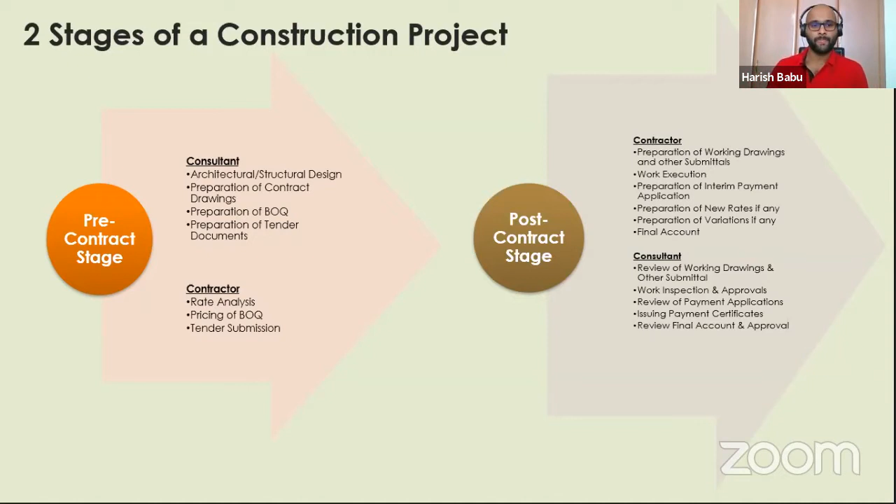So these QS responsibilities, I will go into detail now. First is preparation of BOQ. What is a BOQ? BOQ is nothing but bill of quantities. As I told you, this preparation of BOQ is the responsibility of a consultant QS in the pre-contract stage.

So how will he prepare the BOQ? He is already having the contract drawing, which is prepared by the consultant. He will review the drawings, and accordingly take the quantities and prepare the BOQ. How will he prepare the BOQ?

While preparing the BOQ, there are a lot of criteria to be met. There are some points to be noted: first, unit of measurement should be as per standard method of measurement. Inclusions and exclusions should be as per standard method of measurement. All items should be separately mentioned as per standard method of measurement. So it's all about the standard method of measurement. What is that?

It is a standard. Everywhere there is a standard for method of measurement. In India, we use IS 1200, Indian Standard 1200, for referring the standard method of measurement. But in foreign countries, including the Middle East, here in Dubai also, we use CESMM3, which is Civil Engineers Standard Method of Measurement Edition 3. This is what we refer to here in the Middle East and most foreign countries, while in India we use IS 1200.

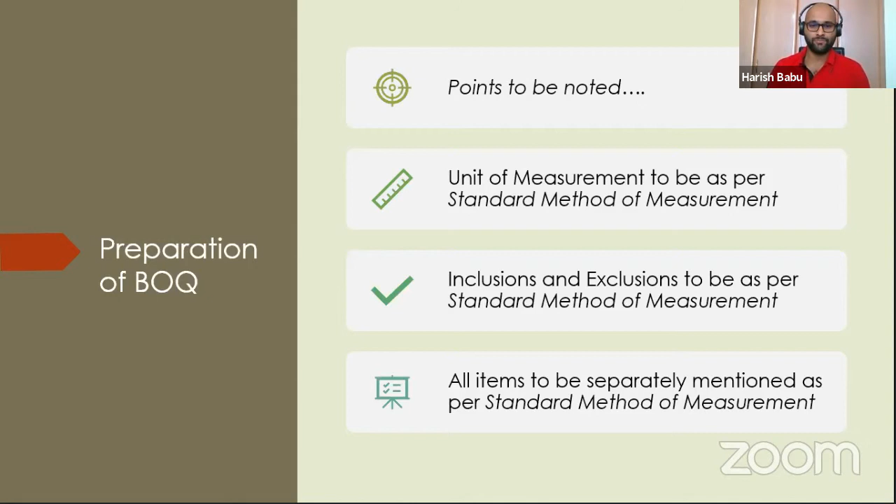This is the question: this is a plan of a concrete slab of 5 meter by 5 meter size, having a thickness of 100 mm. There is an opening of half meter by half meter at one corner. My question is, what is the BOQ quantity or payable quantity for the concrete as per IS 1200?

Basically it is a calculation question, very simple for everyone. If I ask you what is the volume or what is the area, then it is very simple. But I'm asking what is the BOQ quantity or payable quantity as per IS 1200. Here is the importance of a standard method of measurement. So before telling you the answer, I will just show you what it says in IS 1200.

This is a screenshot I have taken from IS 1200 part 2, which explains concrete works. Here you can see, first thing, unit of measurement: unless otherwise stated, all concrete work shall be measured in cubic meters. In this question, I have given the options in cubic meter and square meter. So the first doubt is clear now: it should be in cubic meter, not square meter.

Next, what it says - in this question, our doubt is whether to deduct this small hole or include it. We can refer to what it says in IS 1200. You can see here, no deduction shall be made for the following: opening up to 0.1 meter cube, or as specified.

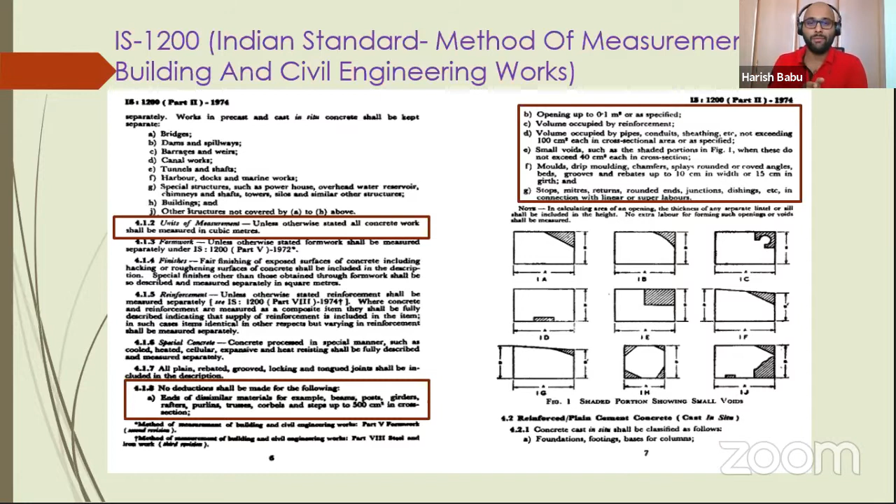Which means no deduction can be made for openings up to 0.1 meter cube. If the volume of the opening is less than or equal to 0.1 meter cube, no need to deduct that area. Coming back to our question, this opening is 0.5 by 0.5. If you calculate the volume of that opening, it will be 0.5 by 0.5 by 0.1 - thickness is 0.1, that means 100 mm. So the volume will be 0.025 cubic meter, which is less than 0.1. So no need to deduct the volume of that opening.

So now it's simple: 5 meter by 5 meter by 100 mm. It is very simple now, 2.5 meter cube - this is the answer. I think around 20% of people gave the correct answer, so it's basically a calculation.

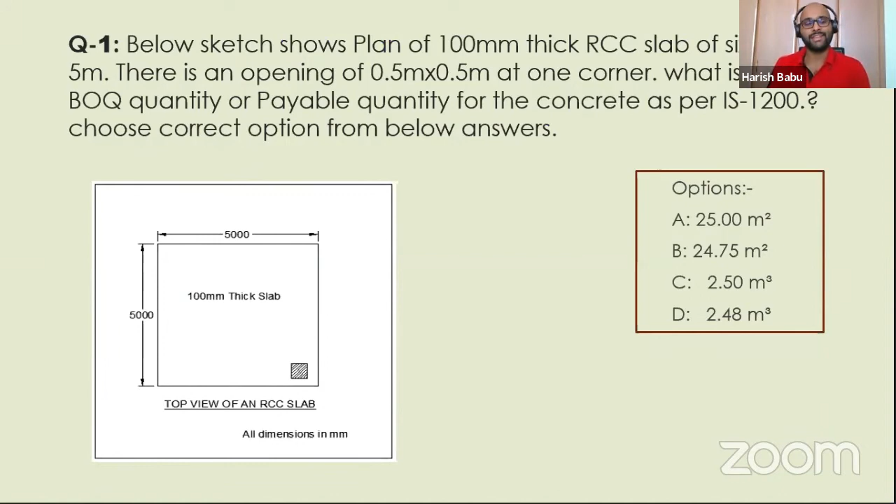But the thing is that we have to refer IS 1200 if you consider it is for a BOQ quantity. That's it, I just want to show you this as a simple example of how we will deal with these things when you are working as a QS. That's it. And the second question...

I will show you here, this is what we refer here, Civil Engineers Standard Method of Measurement, CESMM3. I just give you one screenshot of CESMM3, in which there also you can see...

It is mentioned here, cubic meter, and measurement rules are mentioned here. Pockets or holes which are defined as large or small voids in accordance with rule D3 of class F, and it mentions what is small and what is large. So this is how we are referring, the same way we referred in IS 1200, we are referring in CESMM3. I'm just comparing the difference in the standard methods of measurement.

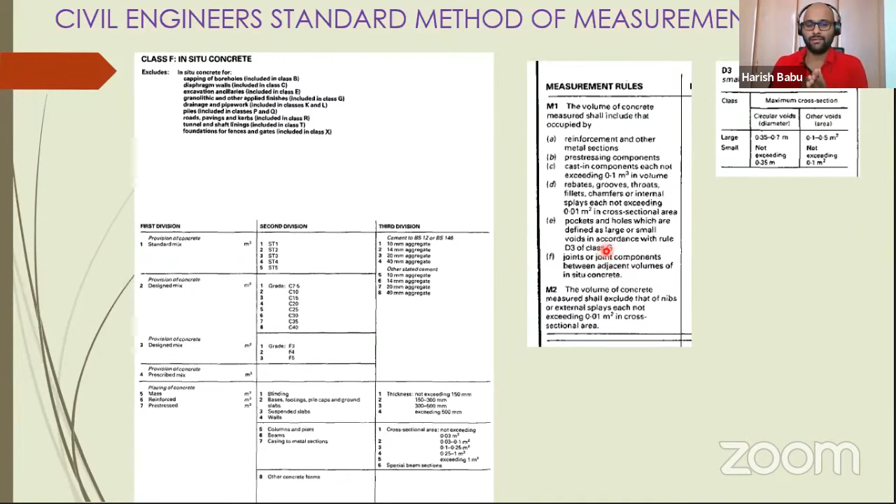That's it. Then we are going to the next, second question, what I asked you. Here we need to excavate a pit of size 6 meter by 5 meter by 5 meter. On the side, we need to excavate extra because if you are excavating in one stretch, the wall will collapse, so we need to give some extra step there. Now the question is, what is the BOQ quantity of excavation for this excavation?

My question is, what is the BOQ quantity as per IS 1200? Not what is the volume of excavation in this picture - that is very clear for you, you will take the step also on the side, add both, and you can get it very easily. It's a simple calculation.

But if you refer IS 1200, you have to know whether this additional step is to be included or not. That we need to check. So if you check in IS 1200 part 1, which is for earthwork, it says here, the following work shall not be measured separately. In that, you can see item C, unauthorized benching or battering for excavation.

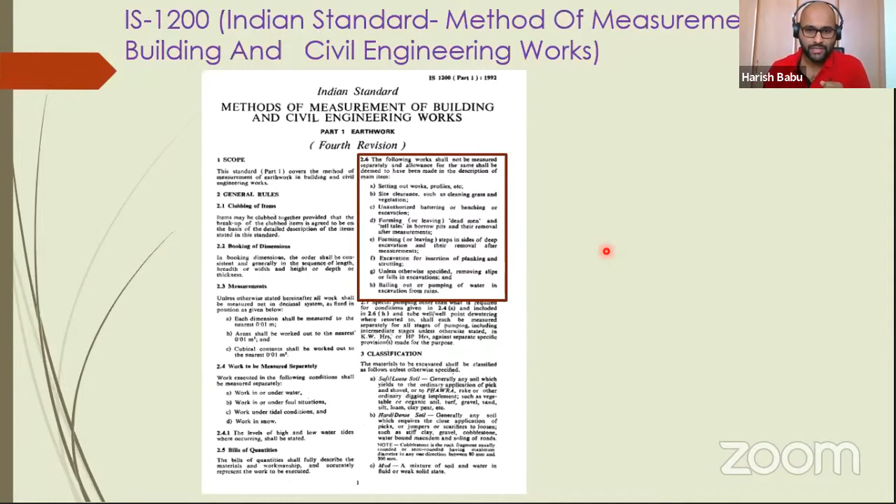And E, which says - I don't know whether it is clear for you, anyway I will read it - steps inside of sides of deep excavation, it is not measured separately. So in this case, coming back to our question, we cannot calculate additional excavation. So it is simple now.

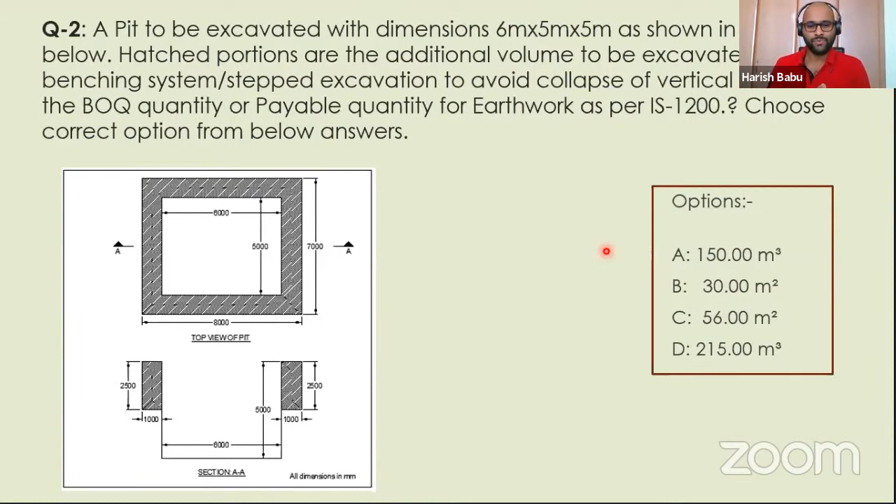It is just 6 meter by 5 meter by 5 meter, which is 150 meter cube. So if you know the way we check in the standard method of measurement, it is very simple. And also I think around 19 to 20% of people corrected it and gave us the correct answer. So this is the difference.

Moving forward, I also will show you what it says in CESMM3, which we refer here. You can see volume of measurement. The volume measured for the excavation of a structure or foundation shall be the volume which is either occupied by or vertically above any part of the structure. So this is only for the structure which is going to come there - that part only will be covered. Any additional excavation on the side will not be covered. It is clear.

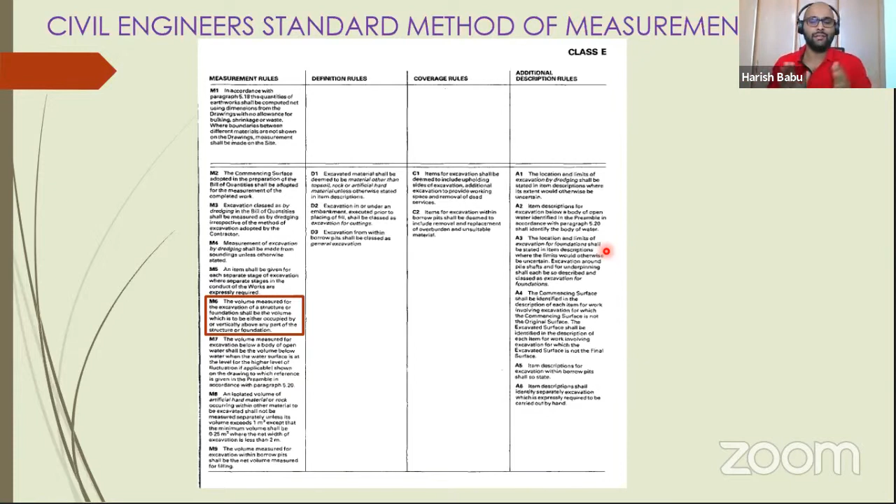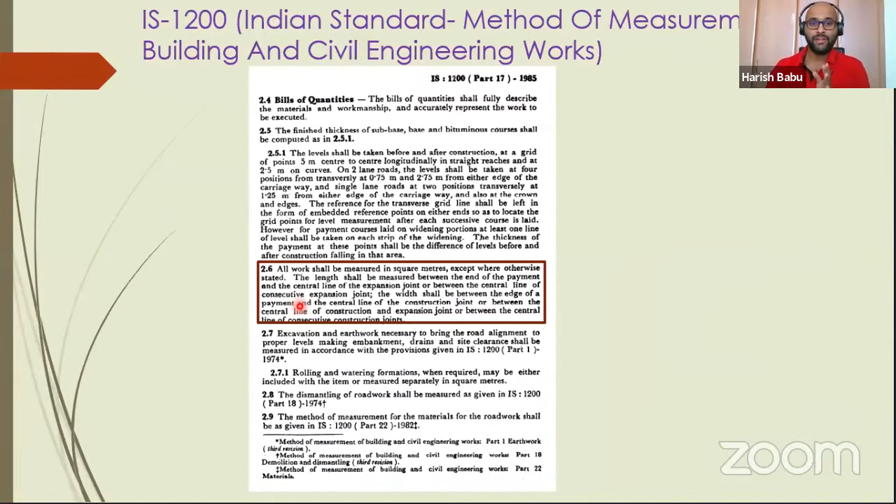Here the part is 17, which refers to road works. In the middle somewhere here you can see the width shall be between the edge of the pavement. Which is edge of the pavement? Here the edge of the pavement is here and it is here. So our width is only 7 meters and the length is 1000 meters.

So the answer is clear now, 7000 meters square. So this slope portion cannot be included in the BOQ. So this is the points.

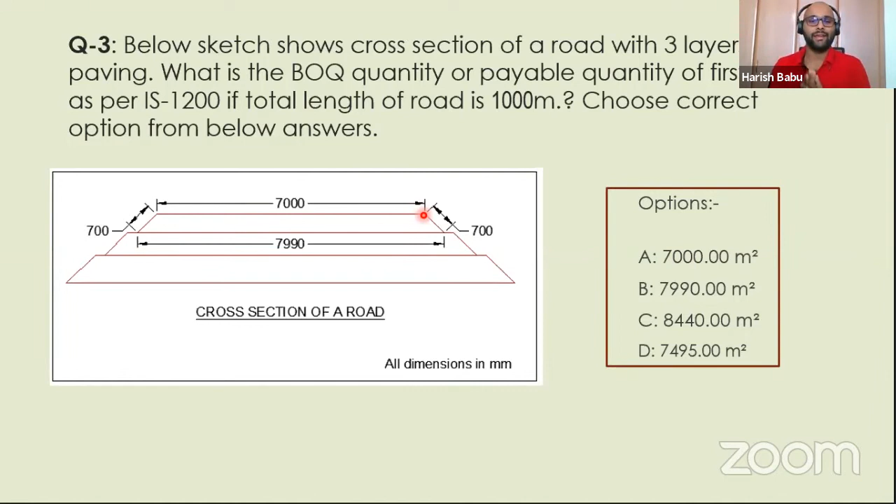These are some examples I have shown you to give you an idea how BOQ is prepared. So what are the factors to be considered while preparing a BOQ? I think now it's clear for you. All the answers are clear for you.

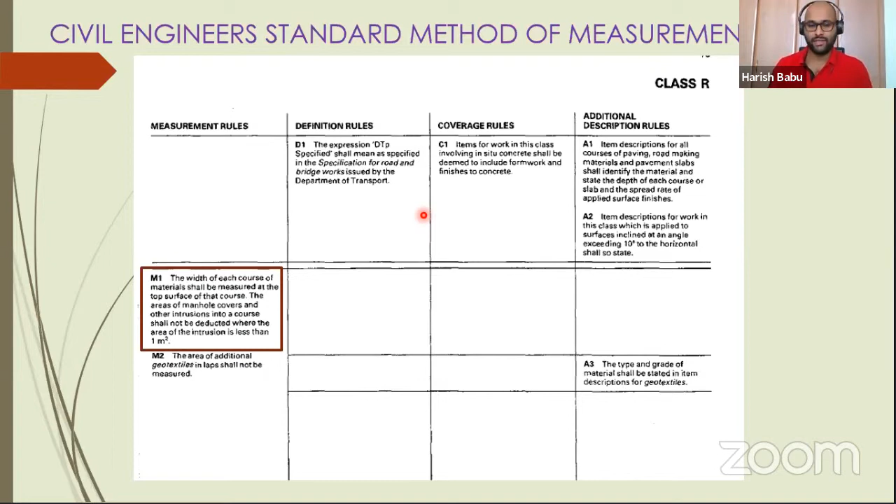Okay, then moving forward. Now, the consultant side, the preparation of BOQ, that is the activity of a QS. Then moving forward, we have the contractor side. Now the consultant prepared the BOQ, everything we prepared as a tender document, then given back to client. Then client called the contractors to quote for the job.

Then there starts the contractor's job. Contractors, what he will do? He will study all the tender document. Then he wants to price the document, price the BOQ. For that one, he needs to do the rate analysis. What is rate analysis? It is very simple. We need to have rate for each item in the BOQ.

For example, if you want to build a 5-story or 6-story building, there we have different BOQ items. There is excavation, there is piling, there is maybe raft foundation, there is brickwork, slab, column, wall, reinforcement. A lot of things are there. So each item to be clearly mentioned in the BOQ. It will be there in the BOQ, which is prepared by the consultant.

Then comes to the contractor side. He needs to check the quantity also in the BOQ, whether it is correct or not. There are two types of contract, mainly two types. One is lump sum contract, one is remeasurable contract. If it is a lump sum contract,

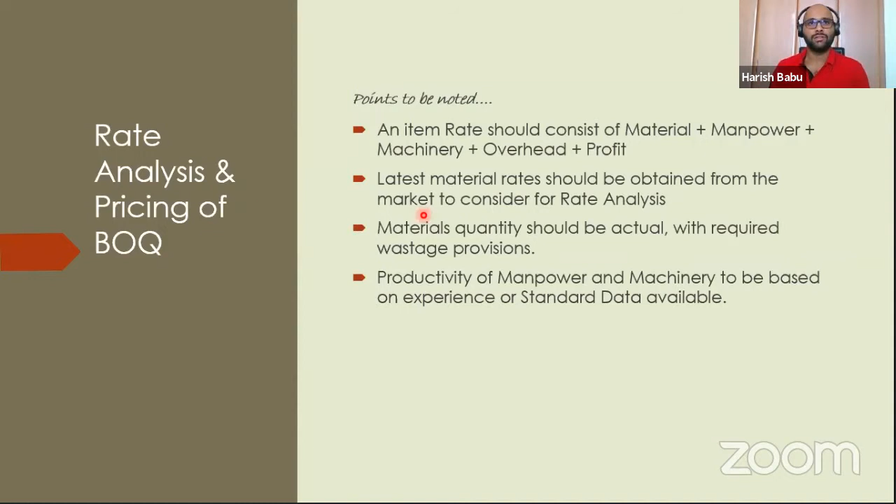Say we have 1,000 cubic meters of excavation to be done. If you don't know the productivity, it is not possible to do the rate analysis. You need to know how much excavation can be done with an excavator in a day. Accordingly you can put the rate of machinery, and accordingly reach the rate.

So the productivity - most companies will have their own productivity based on their experience. There are some standard data also available, but most companies are not referring to any standard data. They are using their own data, which is by experience.

Then also, when you are doing the pricing of BOQ, you have to check if any additional items are missing - whether all items are included in the BOQ or not. For example, if you are doing a building work, if one item is missing there in the BOQ, like plastering, you have to identify if there's any missing item. If any missing item is there, you have to add it separately and explain what it is. That also you need to make sure while doing the rate analysis and pricing of BOQ.

So these are the major points while doing the rate analysis. When you do the rate analysis as a QS, as I told you, you have to calculate material, manpower, and machinery - this is the cost. Then additionally you have to add overhead, which will be company specific.

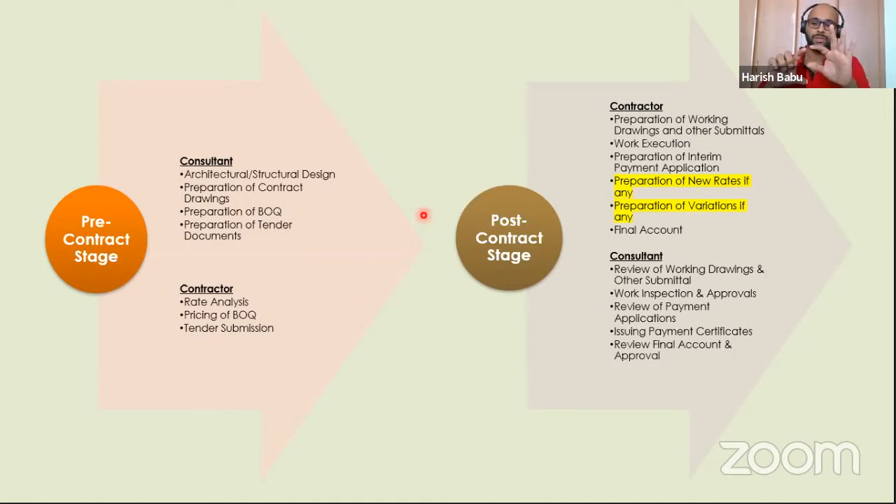We have to split our rate into manpower, machinery, material, overhead, and profit. Based on this, we will find out the new rate and what additional work is involved in the new item. Let's say instead of 50 we do 60, so more material is needed. We check whether any additional manpower or machinery activity is involved. If not, we will not add that part; only the material part will be increased.

Then we will submit our new rate. The consultant will check whether the rate is okay or not, and then he will approve it. This is the process of making new rates.

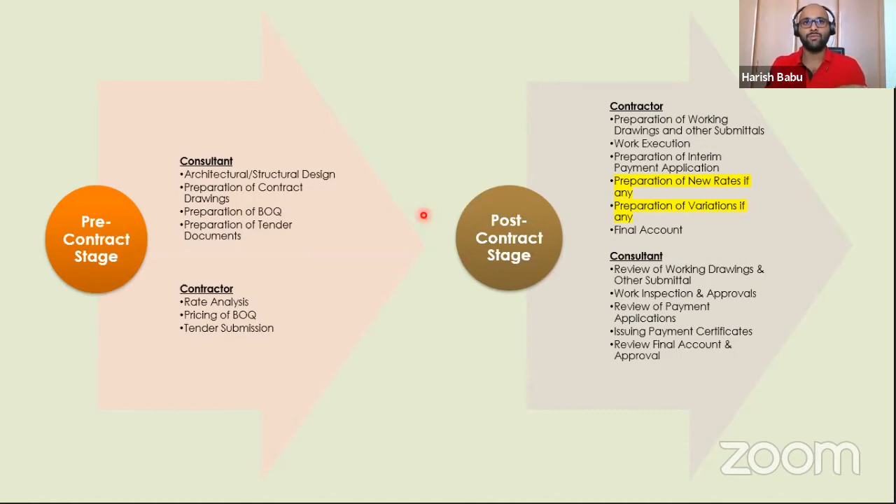Variation works the same way. Variation means this work is a variation. So we need to submit a variation - for example, if they ask you to lay an additional 1 kilometer of temporary road, we have to find out the total quantity, the new rate, and prepare a separate variation mentioning the total amount coming for this variation. We need to submit this. That is variation.

So you can see here, new rates are prepared based on additional items which are not part of the BOQ. New rates are derived from any existing rate with the help of a schedule of rates.

What is a schedule of rates? It is nothing but the percentage breakdown of your rate. When giving a rate to the client, you also have to give the percentage breakdown - what is the percentage of material, machinery, manpower, overhead, and profit in that rate. Based on this percentage, we derive our new rate.

Supporting documents are also to be submitted if required for the new rate. If you're purchasing any new material, if you have a purchase request, supplier invoice, or anything similar, you can attach that along with the new rate. This is all about variation and new rates.

Next is the consultant side. In the post-contract stage, the consultant is just a mediator between client and contractor. The consultant checks and inspects the work at site, whether it's done as per specification or not, and accordingly approves our work, our payment application, and our submittals, and issues the payment certificate.

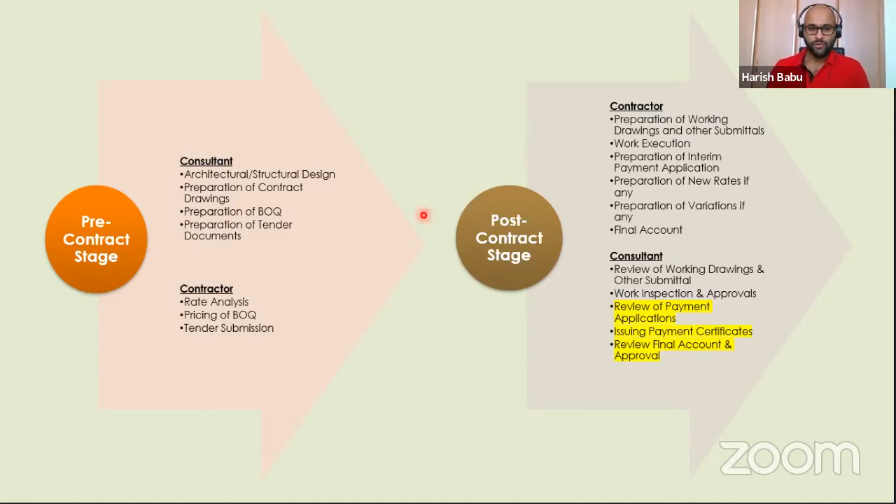Moving forward, there are additional responsibilities. Whatever I've mentioned so far are the basic responsibilities of a junior or mid-level QS. When you're promoted to higher levels, you have more responsibilities - if you go to a senior level or managerial level quantity surveyor, then you have more responsibilities. What are those responsibilities?

One is contract administration - that's important. What is contract administration, what is a contract? I told you a contract is the agreement between the client and the contractor. Contract administration is an important part because there are a lot of conditions mentioned in the contract, so we need to check whether they're complying with all the conditions mentioned in it.

For example, in case of payment, it may be mentioned in the contract that you will get payment 30 days after completion of work. If the client is not paying you within 30 days, you have to inform them - it is a contractual matter.

In this case, the contract condition is not followed. So it is the QS's responsibility to monitor all these things, whether it is as per the contract or not. You have to be very careful about what is mentioned in the conditions of contract, the general conditions and particular conditions of contract. He is involved in finalizing the contract with the client in the pre-contract stage. When the contract signing is happening, it is the senior level QS's responsibility to go through the contract, read everything, and understand everything.

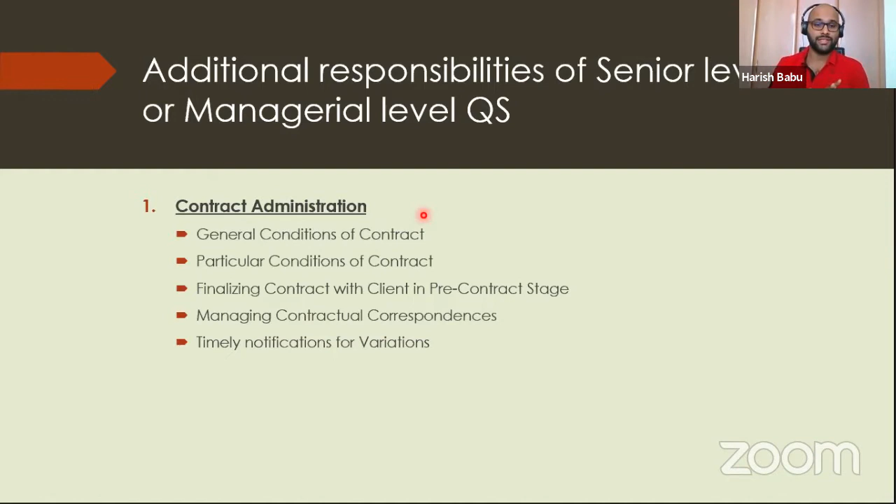Then there is managing contractual correspondences. What is contractual correspondence? If there is any variation or deviation from the contract, we need to write it officially. We need to give them a letter officially saying that the contract says so and so, it is not as per the contract, so this is a variation, or these are the issues. We need to inform them in a timely manner. This is what a senior level or managerial level QS job is. So this is very important - contract administration is very important.

I am showing here one conditions of contract. This is called FIDIC - FIDIC conditions of contract for construction. This is the one most companies are referring to in most countries. But some countries will have their own conditions. I don't know how it is in India - I think some projects use FIDIC, and some projects have their own conditions. Anyway, in most countries it will be FIDIC, which is the basis of preparing the general conditions of a contract.

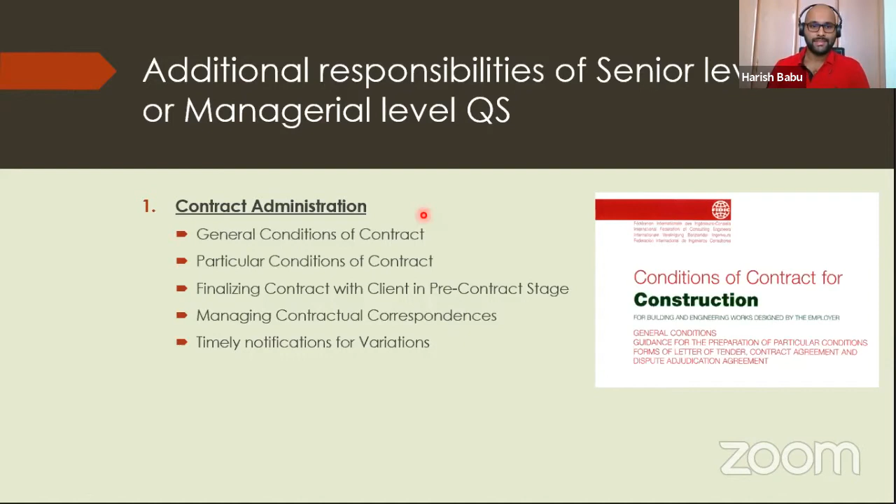Then there will be particular conditions. Particular conditions means if a client wants to add something additionally in the contract in his favor, he can add that. That is the particular conditions of contract. So I'm just showing this to tell you that this is the conditions of contract followed in most countries. The next responsibility of a senior level QS is project forecast. What is project forecast?

Project forecast means foreseeing. Forecast of material requirement with the help of planning engineers. Let's say if we have a 2-year or 3-year contract, we need to procure our materials and order them based on the requirement at site. We don't know exactly when the requirement will come, so we do the forecast. How? We have the planning engineers who prepare the program of work for the entire duration of the project - what activities come when. Accordingly, using this program, the QS has to calculate the quantity required at that particular time.

For example, next month we have 10 square meters of block work to be done, and the month after that, another 100 square meters to be done. Accordingly, the QS has to calculate what quantity is required at that time. This will be useful for purchasing the materials. Okay, this is the forecast of materials.

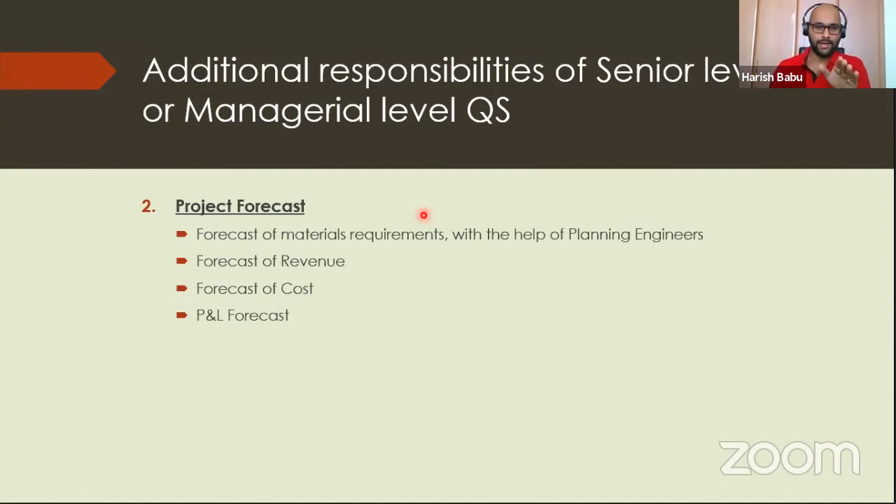Okay, these are all responsibilities of QS under project forecast. Next is costing of project. What is costing? Costing is nothing but comparison of cost. There is estimated cost - when we are doing the rate analysis, we have an estimate of cost. We have material cost estimation, machinery cost, manpower cost. So we compare this cost when we are doing an activity, we check the actual cost.

So this is the comparison statement between estimated cost and actual cost. This is required because we need to know whether there is any additional cost, additional material cost, or additional manpower cost. If there's anything, we need to restrict that. We need to know, we need to monitor that. That's why we are preparing the comparison statement.

Then reconciliation of materials. What is reconciliation of materials? We know we have estimated some quantities of material for a particular work. As per the estimate, we have some quantities. So when we are executing, whether it is the same quantity we are using or not, that we need to monitor - that is called reconciliation of materials. If there are any additional materials used, or something is wasted more than what we estimated, we need to monitor that. That is the responsibility of a senior level QS, reconciliation of materials.

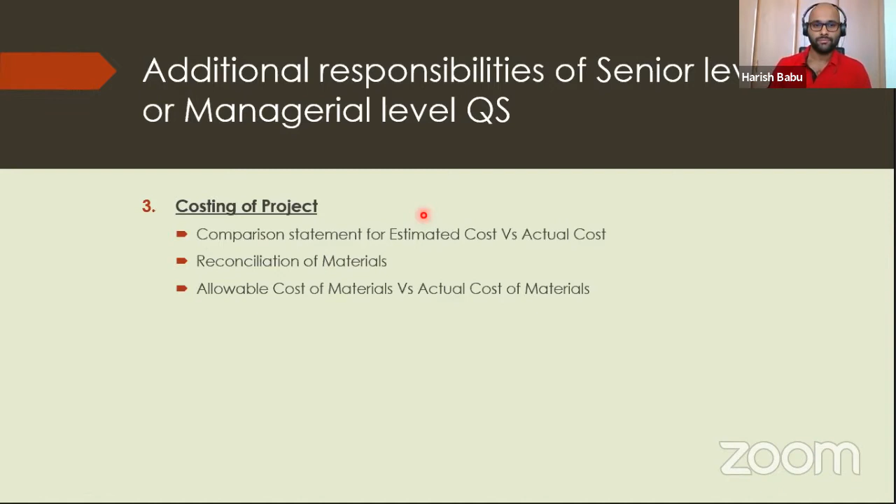Then it is preparation of financial report. What is financial report? Every month, a senior level QS or manager level QS needs to do a financial report for the project - it is nothing but margin analysis, analyzing the bottom line, revenue minus cost, what is coming at the bottom. If it is loss or profit, every month we have to do it, on a monthly basis plus project to date - whatever work done so far for the project for the last 5 or 6 months, for the entire project, what is the bottom line now, whether profit or loss. This is the profit and loss statement for the project. This is also a responsibility of a senior level QS.

And that's all about my topics for today. I hope you have got a fairly good picture about how it is going in the construction industry. Okay, so now it's up to you people - you can ask any questions if you have any doubts, open up. Thank you.